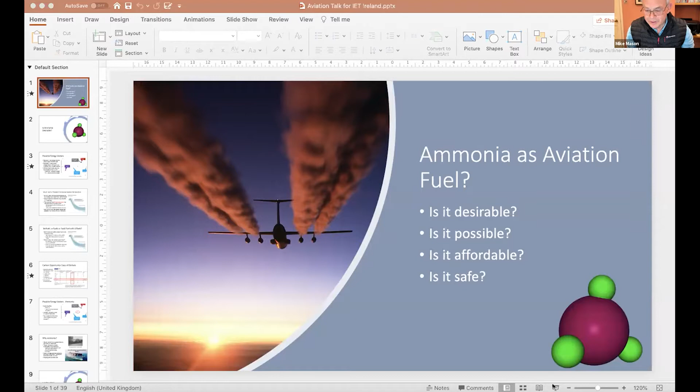Hello everyone. Is that up now? Can you see it? That's fine, yes, I can see that. Good. Right, let's move it to a slideshow. There we are. So lovely to have everyone here. And it's a very strange thing, isn't it, talking to an audience that you can't see. It's a bit odd, but it's taken a little while, I've got used to it now.

What I want to do today is to challenge people about where they think aviation may go. We've heard a lot about batteries, a lot about hydrogen, something about synthetic fuels, and I want to throw all of those into the pot and look at the question again to see whether we might have been missing something important.

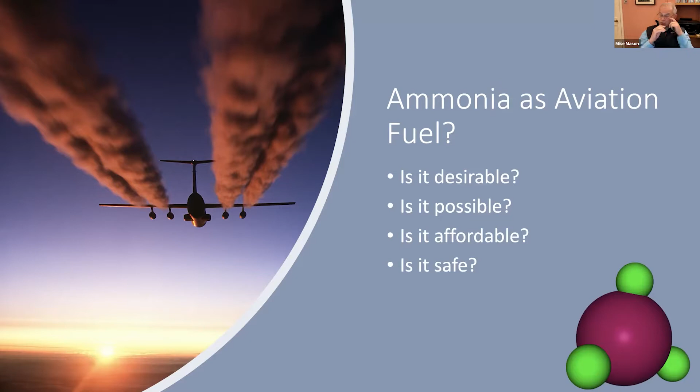So ammonia as an aviation fuel. We've got four questions we need to answer. The first is: is it desirable? Do we actually want it? Is it possible? Is it affordable? And then finally, and probably the most difficult, is it safe? So what I'm going to try and do in the next few minutes is talk through each of those pieces in that order. Let's start with, is ammonia desirable?

So what possible energy vectors have we got? Batteries: future batteries will get better than they are today, but this graph shows on the x-axis the gravimetric energy density of various ways of powering your aeroplane, and on the y-axis the volumetric energy density. Note they're both log scales, and batteries are right down at the bottom left-hand corner. Not a really good place to be.

Hydrogen is incredibly good in gravimetric terms, right off the right-hand side of my graph, much better than kerosene up at the top right. The problem with hydrogen is that you're fighting with physics to use it. The US government has a target for practical storage of hydrogen, which takes you right down to that solid blue dot. The reason is that to have liquid hydrogen, you need to operate at minus 253, about 20 Kelvin. Alternatively, you have to pressurize to 700 or 800 bar. But even as a liquid, there is almost twice as much hydrogen in a liter of liquid ammonia as there is in a liter of liquid hydrogen. Hydrogen superficially looks very interesting, but it's not really going to solve many problems for long-range flight.

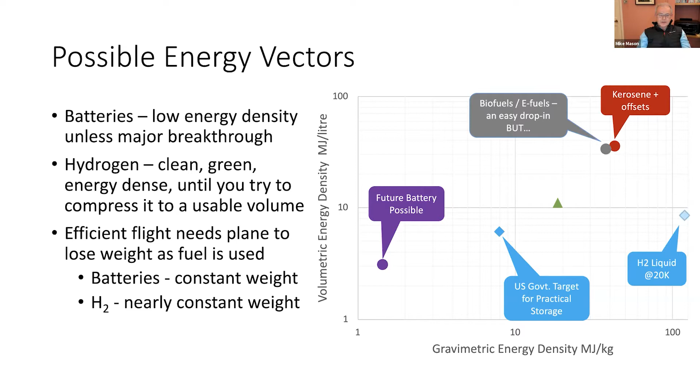So that leaves us with biofuels and e-fuels. Biofuels are made from bits of plant, oils. E-fuels would be made from carbon dioxide, which you then chemically reduce and combine with hydrogen to produce chain elongation, producing fuels you can use as drop-ins as a replacement for kerosene. Looks good, very interesting, but let's just look at what the world might look like by 2040, 2050, when these become the normal way of flying.

The graph on the right, some of you might have seen, is from the summary for policymakers of the IPCC's special report on holding temperature rise to 1.5 degrees centigrade above background. 1.5 degrees is tougher than the Paris target of 2.

It is probably in its own right already too high, but as one famous British government chief scientist said when questioned why he wasn't making these points to politicians, he said if we said how difficult it was going to be, no one would believe us and they wouldn't do anything.

The blue region there gives you an idea of where we might need to be with no or limited overshoot in our budget. There'll be a bit of overshoot. The gray is what we might have to do if we have more realistic amounts of overshoot. And if you look at that, you can see that somewhere like 10 gigatons a year of negative carbon dioxide is what we're going to need.

This is not net zero, guys. Don't be fooled by the comments about, oh, we're going to get to net zero. No, no, no, we have to get to net negative. And when you're at net negative, there is no carbon coming from convenient flues or anything like that.

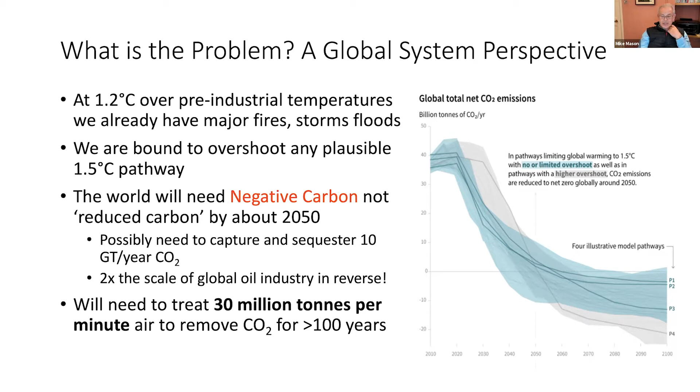Now, in that context, imagine that you're going to capture some of your CO2 and turn it into fuels and re-emit it. Well, every ton of fuel emits 3 tons of CO2. Business as usual emissions suggest that by 2050, we'll be at 2 to 4 billion tons a year of CO2 from aviation. And that adds 20 to 40% to an almost impossible global CO2 capture needs.

This is not likely to happen.

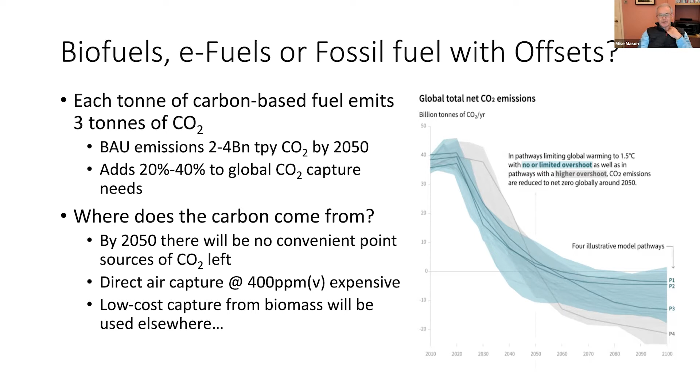Biofuels then are the next resort that people turn to and say, well, but can't we use biofuels? And of course you could use biofuels. You can make airplanes fly on biofuels with no problem at all. But we are already deforesting large parts of the world to feed us. To get a ton of biofuel, you need a ton of palm oil.

There's your vegetable oils. That's the CO2 emissions that come from producing a kilo of them. If you want a ton of vegetable oil, it'll cost you 11 tons of CO2. Now that's a combination of direct emissions and indirect emissions, the opportunity cost of not reforesting those spaces. And in the case of oils, you've got lots of peat being lost in Kalimantan to provide the land for the palm plantations. And of course, you've got massive biodiversity loss.

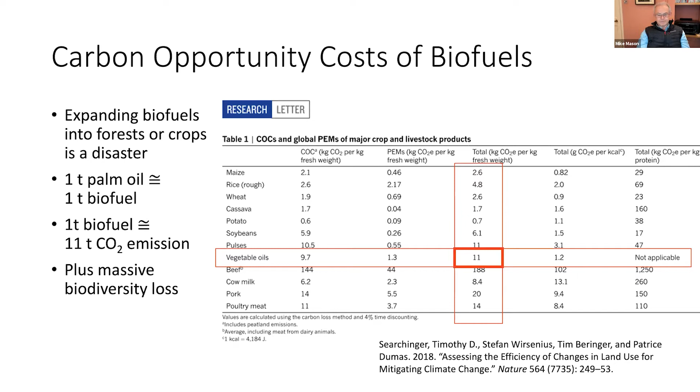But then when you've got your ton, you've still got 3 tons of CO2 that you've got to dispose of. You can't just keep, you'll have to keep getting that back.

So this leaves us with ammonia. Ammonia is easily liquefied, 10 bar, minus 33 centigrade, which is the air temperature at 8,000 meters anyway. It's a natural liquid. It's very flexible. You can burn it, you can use it in fuel cells. It's not as good as kerosene, but the question is, could it be good enough?

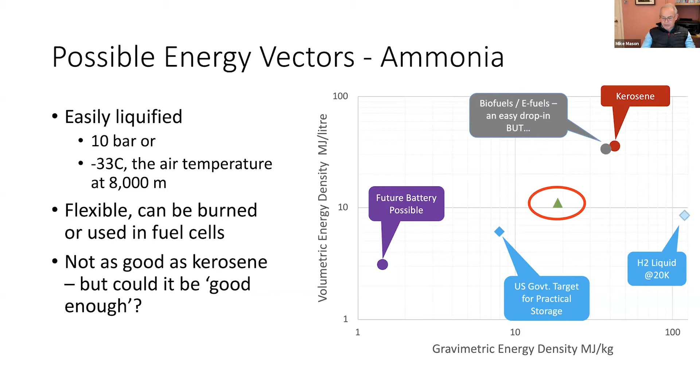It's the best of all the other alternatives that we've looked at. And then, well, why ammonia? What about some other chemistry? Well, you can look around the periodic table. There aren't many other things that you could carry hydrogen with and use as an energy source. I mean, if you go down the periodic table, you end up with solids, silicon, for example, but silicon dioxide is not the kind of thing you want to carry around and be throwing out of an engine. It's sand. And ammonia is interesting.

I mean, brown ammonia has been around for 100 years, a global industry. Green ammonia is totally sustainable in the long term. It's made from earth-abundant stuff, air, water, sunshine, no rare materials, no carbon. There's a huge existing market for it.

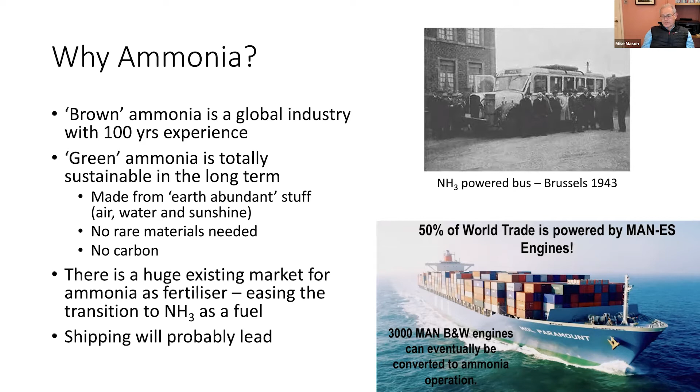Shipping will probably lead. Shipping is already moving towards ammonia. And you can see there in the Second World War, the Germans took all the road fuel for their tanks in the Russian campaign. And so the Belgian municipal authorities in Brussels converted their entire bus fleet to run on ammonia.

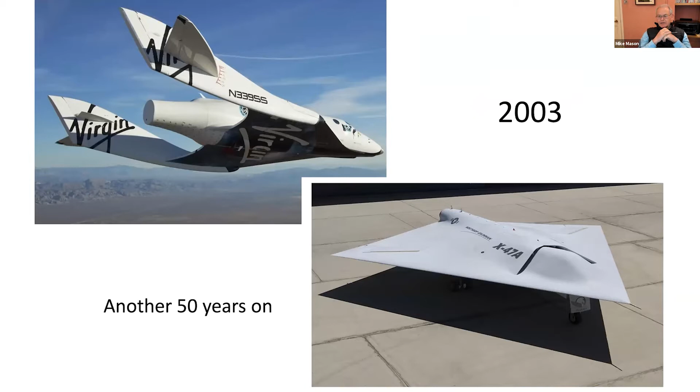So is it possible? Well, let's just look at some 50-year shifts in aviation. That was 1903. That was 1953. That's what you can do in 50 years. By 2003, we were here. There's an amazing change again.

But in civil aviation, in those 50 years, we added a few windows on the top deck of a 747. Of course, there was lots of work went on improving efficiency, engines improved, flight control systems improved, avionics improved, but fundamentally, the plane of 2019 was utterly recognizable as the plane of 1969.

My first thesis is that aviation could move faster. It needs the right stimulus. How would you adapt to ammonia?

Well, there are some major challenges. The first is that ammonia has something like 40% of the energy content per kilogram of kerosene. And the big one is that ammonia brings safety concerns as a result of vapor toxicity. It's really toxic at a concentration somewhere above 3 to 3,500 parts per million in the air.

So what are the fixes we could put in place? Well, the first is we could move from jet to propeller. This increases your propulsive efficiency materially. It will slow the aeroplane down, and that might be a price we have to pay, though the use of ducted fans and contra-rotating propellers might give us quite a lot of that speed back.

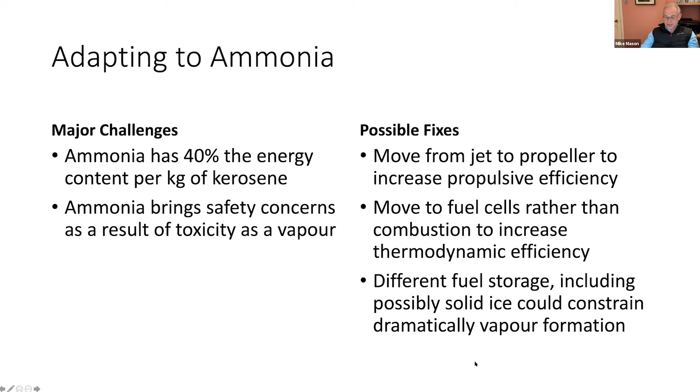And the prize is huge. We could have quieter, zero emissions aviation. It would become the most sustainable form of transport of all. It would move from pariah to prize. Very, very little land take, much less than rail or road, no intrusive noise, much faster than the alternatives. It's much safer than the alternatives. It's flexible and responsive. Once you've built a road or a railway from A to B, you can't really move it if patterns of travel change. And of course, it has unlimited growth potential.

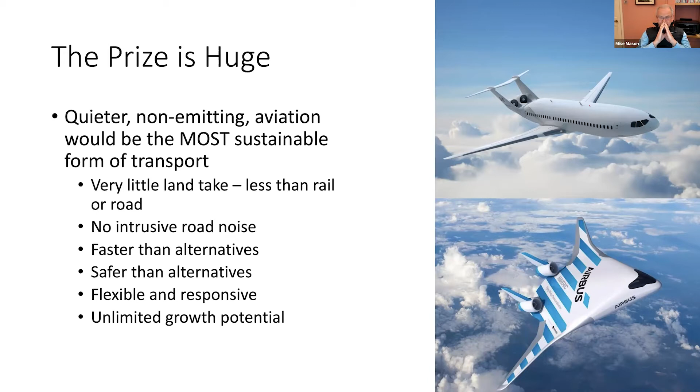So if we're going to use ammonia, we've got two contrasting approaches that we can think about. One is combustion, and the other is fuel cells. Combustion is really a near-term solution. We've got existing manufacturers that know how to make turbines. NOx control is not fully resolved. It's worth just talking a bit about this for a moment.

The problem with ammonia in a combustion process is that when you strip the hydrogen off it to oxidize to water, you leave a nitrogen free radical sitting unbonded. And there's another nitrogen sitting nearby, and hey presto, you get N2 most of the time. But occasionally you get the N bonding with oxygen and giving you NOxes. It's a much easier thing to happen than when you've got just N2 there and you have oxygen as well. That requires a very high temperature to form NOxes.

You can get much more NOx formation at lower temperatures in combustion. The solution to that is being worked on at the moment. In Cardiff University, they're doing quite a lot of work on combustion.

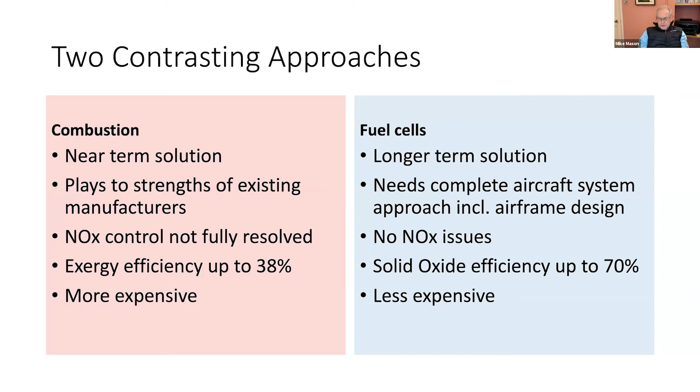Running gas turbines is an expensive business. Fuel cells are different. In the longer term, they're going to be the solution. You need to rethink the complete aircraft system right through to airframe design. There are, of course, no NOx issues. Your solid oxide efficiency is up to somewhere like 70% for solid oxide fuel cells, and they'd be much less expensive to run in the long term. There are no moving parts.

So what's the roadmap for ammonia power look like? What I've modeled here is an A320 class aeroplane. I've taken the same maximum takeoff weight, the same payload. I've done nothing to change its aerodynamics, and there are improvements we can make there. I have made it fundamentally propeller driven. I've reduced the speed from about Mach 0.85 to about Mach 0.45. And I've modeled two different options, an ammonia turbine and a fuel cell electric.

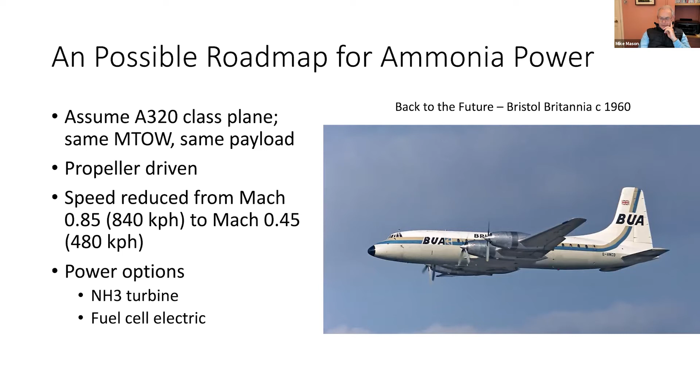That plane on the right is one that I first flew in out to East Africa. It was a wonderful aeroplane, about 385, 400 knots, not a bad traveling speed, not as fast as today.

So if we look at those four options for how we could power this, on the left here you have a graph which is the comparative energy use, megawatt hours per 1,000 kilometers, for four different ways of propelling the aeroplane: the existing turbofan, an ammonia powered turboprop, a 60% efficient fuel cell, and a 70% efficient fuel cell.

The delivered energy at the bottom, the blue bit, is exactly the same across all of them — that's the energy put into moving the plane forwards. The propulsion losses drop considerably, that's the orange band, as you move from turbofan to turboprop or electroprop. Your thermodynamic losses drop dramatically, and the electrical and mechanical losses as you move away from a turbine — that's the gray area. And of course the fuel cell losses sit on the right-hand side with the fuel cells.

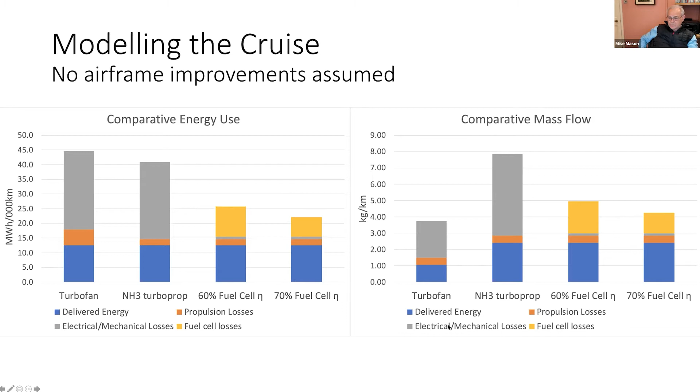So what you see is that in energy terms, fuel cells at 60-70% efficient are dramatically better than kerosene in a turbofan. The graph on the right replicates the same things, but this time it's the comparative mass flow, looking at kilograms per kilometer flown. You see the turbofan is the most efficient in terms of weight. The turboprop looks not very good, and the two fuel cells get better — at just 70% fuel cell efficiency, you're almost as good as the turbofan. That's really interesting. Hydrogen would never get anywhere close to that.

The problem that you have with flying — and I don't know how many of you are pilots — the problem is takeoff and climb. In the cruise you need a relatively small amount of energy, maybe 40% of the power you need at takeoff. And that's convenient because your gas turbine is dealing with air that's only got 40% as much oxygen in it, so the power curve matches roughly what you need at different phases of the flight.

What you actually need, if you're going to climb at 2,000 feet a minute, is a very substantial amount of extra power, perhaps 10 megawatts per engine compared to in the cruise. If, on the other hand, you're climbing at the slower rate of a turboprop, you only need to add something like 4 megawatts per engine.

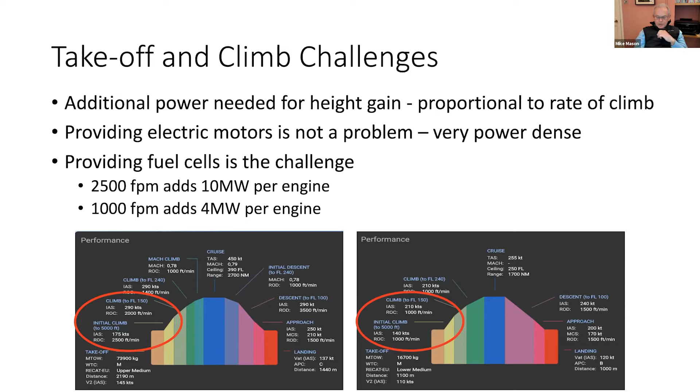And this comes to one of the biggest problems with fuel cells, which is fuel cells are heavy. So you want to size your fuel cell for the biggest part of the flight, which is the cruise. And that leaves you with the question of how the hell do you actually get to the cruise, how do you get in the air? The solution is to have a hybrid, and to put an auxiliary power unit and generator in there — these are very light units with very high power to weight ratios.

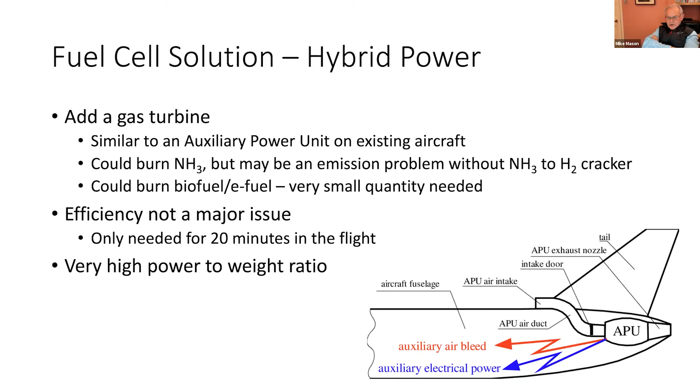You can burn an ammonia hydrogen mix that's been cracked, and you could even burn biofuel E-Fuels. You need a very small quantity indeed — you only need it for the first 20 minutes of the flight.

But let me talk a bit about fuel cells for a moment. Basically, if you think of a fuel cell, it is fundamentally a linear device. Fuel comes in at one end and flows through the cell, and on the way it is consumed, and at the outlet you have mostly consumed fuel.

But of course the rate of consumption will fall as the partial pressure of fuel falls. If you have an infinitely long fuel cell, you could use it all, but that would become incredibly heavy. So you have this problem: do I build a fuel cell that consumes all of the fuel, or nearly all the fuel because it's asymptotic, or do I waste a little bit of fuel? If you want high power density fuel cells, one of the solutions may well be to run them slightly less efficiently and waste more fuel.

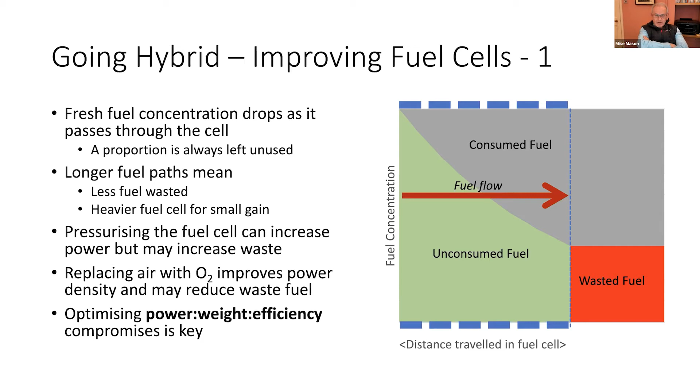The beauty of this, though, is that we can now take the wasted fuel from that and put it into an auxiliary power unit and essentially burn it off and generate power with that too. So we have an interesting piece of engineering here to optimize the balance between the fuel cell and the gas turbine. There's also considerable exergy available to you at 600 to 800 degrees centigrade, and there's some heat recovery possibilities in there too.

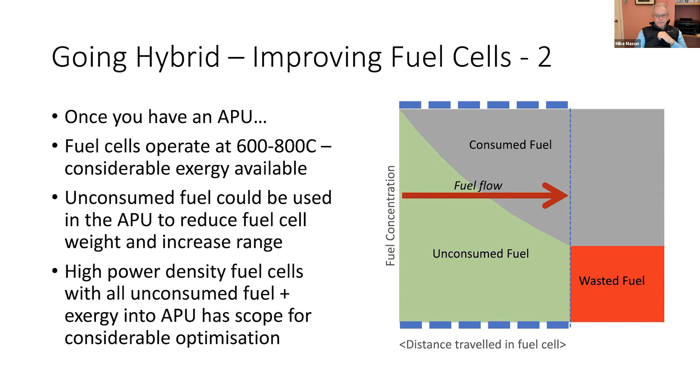So what does this mean for the range of the aeroplane?

On the x-axis, I have the power density of your fuel cell in kilowatts per kilogram, and on the y-axis, we have the range in kilometers. The dotted purple line at the top is the range of a Boeing 737 or an A320 today burning kerosene. If we converted that to a simple turboprop burning ammonia, it would be the brown line in the middle of the graph. So even if we take the simplest of choices, we can realistically get 3,000 and a bit more kilometers of range out of burning ammonia.

The fuel cell options are the two red lines, 60% and 70% efficiency. And you can see that as the power density rises above about 1 kilowatt per kilogram, you start to get really useful increases in range, and you can get up to 5,000 kilometers with high power density fuel cells.

So the way I see this happening is that we will start with turboprops running on ammonia. That will let us put infrastructure into airports, get the systems in place, and allow us to play with safety systems and the like. In the interim period, people will be doing work on fuel cells, and they will come into their own maybe 5 to 10 years later.

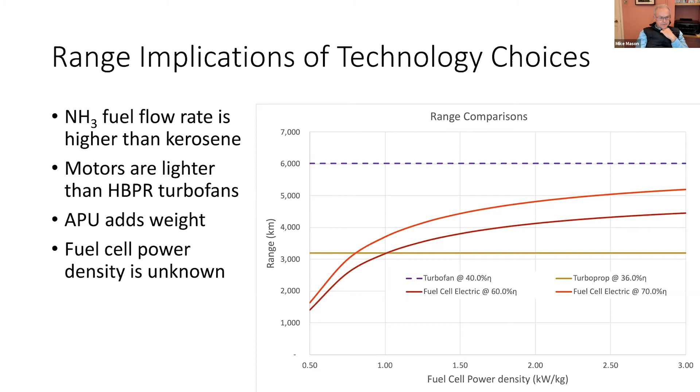Can we afford it? So one of the things about ammonia is that ammonia is made in a number of ways. Today, brown ammonia is made by steam methane reforming

to produce the hydrogen. In the future, it's going to have to be made with electrolysis, and it's going to have to come from renewable power. Solar power in sunny deserts is already about $13.50 a megawatt hour. Perovskite tandem cells due out from people like Oxford PV this year will be hitting 26% efficiencies, and I think they have a roadmap to go to 35% efficiencies.

I can see solar cells producing power at well under $10 a megawatt hour in sunny places. I've assumed no improvements in the Haber-Bosch process; that's pretty mature and unlikely to change very much. What we have here is the cost build-up in dollars per megawatt hour of lower heating value. And you can see today, ammonia at $100 and something a megawatt hour is not a cheap fuel, but by 2030, 2040, it's a very, very competitive fuel.

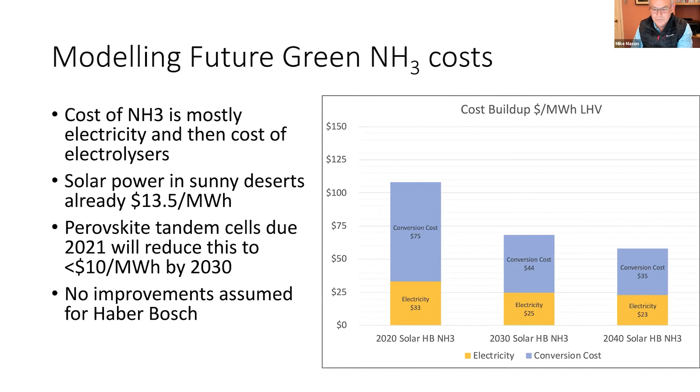How competitive? Well, think about your aeroplane for a second and think about running it on either the turboprop or the two fuel cells. The graph at the bottom left there is just a reprise of the one you've already seen. The larger graph compares a 35% efficient kerosene turbine with a 60% efficient fuel cell propeller-driven plane.

The red dotted line across the middle is the cost per megawatt hour of delivered energy. This is energy imparted to the airframe from the existing engines, and it's about $200 odd a megawatt hour, and that's at today's very depressed kerosene prices. The green dotted line is the same thing with $100 a ton of CO2 added.

The three curves are for different costs of capital producing ammonia and burning it in the plane. What you see: the 2020 is the purple one. 2020 is not very attractive today, and the fuel cells are probably not ready. But by 2030, the light blue, or 2040, the sort of orangey brown one, the delivered energy cost of ammonia is actually cheaper than it is from kerosene. This is hugely important because fuel is the biggest single part of an airline's costs.

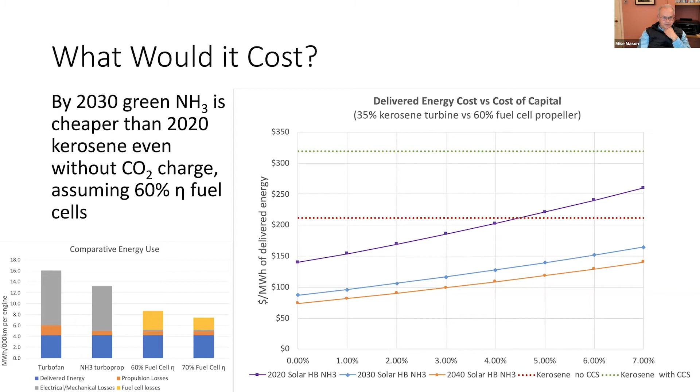So that takes me to the most challenging part of this: how safe is it? The first thing to say is that ammonia is non-flammable. It is almost impossible to light ammonia in open air. And both the UN and the US Department of Transport treat it as a non-flammable substance.

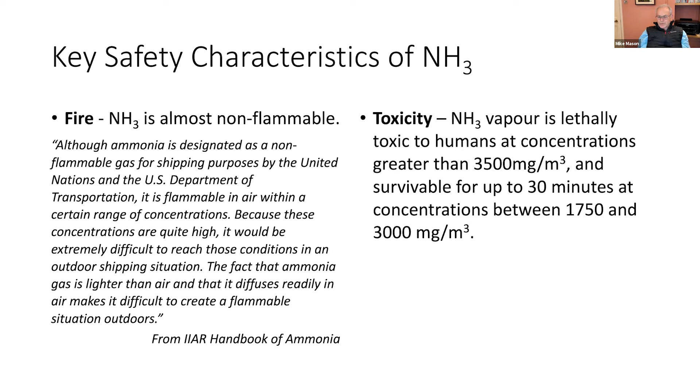The problem for ammonia is its vapor toxicity. It's lethal at 3,500 milligrams per cubic meter. And the last thing you want is people to be caught in that.

So safety implications: on the ground, I don't think we have to worry. We've got 100 years of experience in the midst of urban areas. It's a fairly negligible risk. I think in Los Angeles there are 50,000 tons of ammonia in the docks. In Rotterdam there's 30,000 tons of liquid ammonia in the middle of the city. The fire risk is dramatically reduced compared to kerosene.

So let's just think about aviation. If you have an accident at height with no survivors, ammonia clearly doesn't pose any additional risk because everyone's going to die anyway. And there are two kinds of accidents, therefore, that matter: there are survivable crashes, and there's a surprising number of survivable crashes.

Airplane comes down - classic one is a runway excursion. It slides off the runway, crashes over a bank, something happens, and some people survive. The second type of accident is crashes into populated areas. So the key questions are really, how large are the risks? Because let's be clear, nothing has no risk - and can they be mitigated?

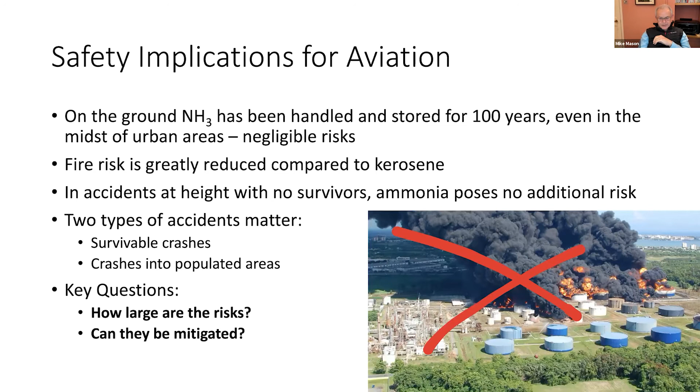So I've looked at every single aircraft crash between 2000 and 2019, 20 years of data, for every cargo plane and every passenger plane with more than 9 seats globally. And the graph shows you the crashes, blue line, and deaths, red line, per billion journeys. It's per billion journeys, not per billion or 100 billion kilometers, because crashes tend to happen on landing and takeoff, not in midair.

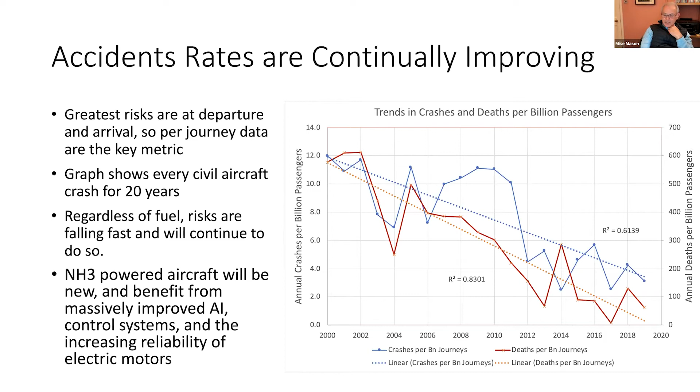Regardless of the fuel, the risks are falling fast, and they will continue to do so. We are moving into a world of much higher levels of artificial intelligence, much better control systems, much more reliable engines. We have aircraft in this crash register that are 50, 60-year-old designs. If you're flying on ammonia, you'll be flying a new design of aeroplane. I think the risks in 20 years' time are going to be vanishingly small.

But when you look at the individual crashes, what you discover is that many of those crashes have no or very minimal fuel tank damage. So survivors are fundamentally not at risk. On the other hand, many crashes involve fires, which cause a major loss of life. So you probably gain more than you lose there.

But let's not accept the gains, let's just look at the losses. A simple projection of the data suggests that by 2040 to 2050, we will see 10 to 15 people's lives being put at risk per billion journeys. Your odds of being struck by lightning are 10 times as high. So I'm not sure—it is clearly a risk, and I'll talk about mitigating it, but actually it is not a material risk going forwards.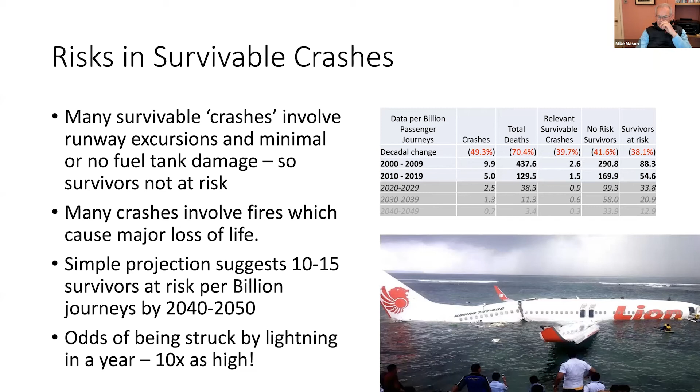Why is that? Well, there seem to be several reasons. The first is there's an increasing number of flights, so every airport sees dramatically more flights. There's also an increasing population close to airports, particularly in a lot of the developing world, where airports started quite far from centers of population, and population has moved closer and closer. And there's a lot of aviation growth in countries with very poor governance and safety culture.

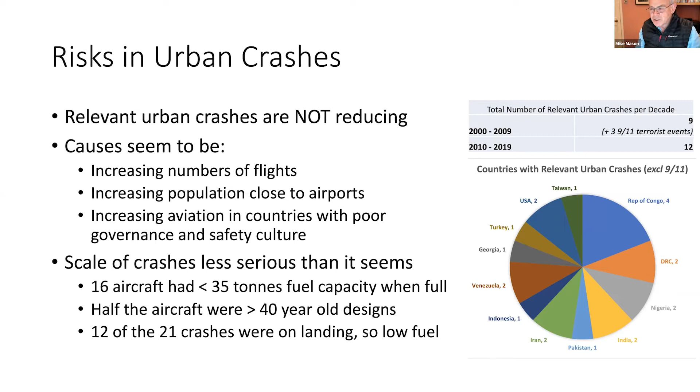And the scale of crash is also a lot less serious than it seems. 16 of the aircraft had less than 35 tons of fuel capacity when full, and half of them were over 40-year-old designs, and 12 of the crashes were on landing with low fuel. One of them didn't have any fuel on board at all. So only a very small proportion of those are material problems.

Nonetheless, we have to look at how we mitigate them. The big problem is going to be vapor. In the late 1940s, when helicopters were coming into the US military, the predecessors of NASA and the US civil aviation regulator looked at crashing planes into concrete blocks to see how they could mitigate fire risk. What they discovered was that in an impact, you create a plume, a plume of mist particles, tiny particles.

The problem with tiny particles is the vapor pressure increases, and this makes life a bit difficult. If you've got kerosene, a very low ignition energy is required, and you get a flash fire.

However, ammonia is very different to kerosene. At minus 77 degrees centigrade, which is its freezing point—a long way above liquid nitrogen, which is a very easy thing to handle and is widely available—the evaporation rate is almost negligible in air. There isn't actually very much energy in air: a cubic meter of air has only got a kilo of air in it, and its specific heat is not particularly high. The specific heat of ammonia is high, and the latent heat of vaporization is surprisingly high. It's quite difficult to get ammonia to evaporate.

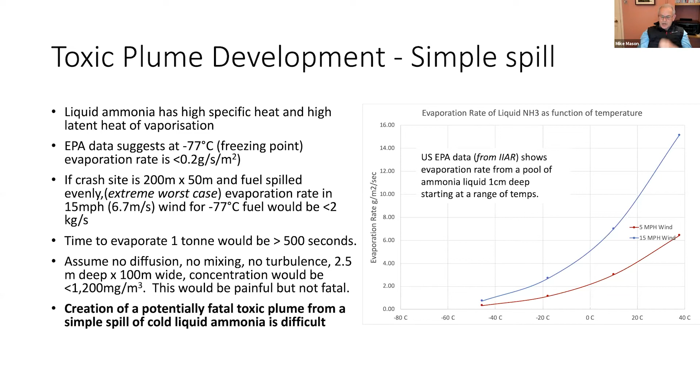You get better evaporation if you follow the blue curve, which is at a 15-mile-an-hour wind rather than a 5-mile-an-hour wind. But of course, if you've got a 15-mile-an-hour wind, you will also have almost certainly much more turbulence and much greater dispersion. Once the ammonia has warmed somewhat, however, it's then lighter than air, and so it rises. So there's a lot of work to do here, but we do start with a position which is quite attractive.

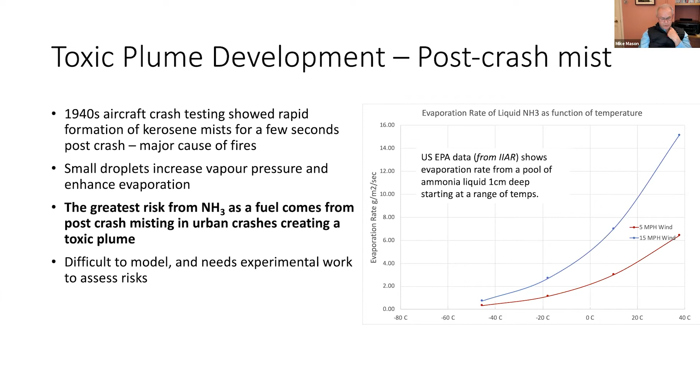It's going to need some experimental work and development, but I think we can do better than just taking a full tank of ammonia liquid anyway. So there are three different ways that we might consider mitigating these risks.

The first is to adopt something the military already use, which is to fill the tanks with open cell foam and have small compartments in them. It doesn't add much weight at all. And if you've ever taken a bath sponge out of the bath, it's surprising how much liquid it will hold for a very long time.

We can dramatically reduce the rate of efflux of liquid ammonia from a crashed and broken open tank by filling it with a sponge. If you then surround the tank in a lightweight fiberglass or something like that as a coalescer, there's a lot of work being done looking at how to coalesce mists, you could dramatically reduce the amount of mist formed. So that's one of the things we can do.

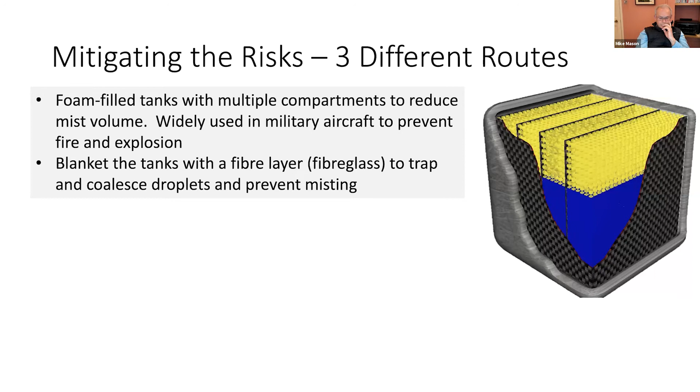The second is really intriguing: we can pump ammonia in as a slush. If you pumped ammonia into the tank at, say, a 75 to 80% ice slush, and then bubbled some liquid nitrogen through, you would freeze it. You would actually have a solid block of fuel. And if you crash that, ice simply doesn't form mists.

You can have some loose fiberglass in there to hold the particles together. And then to get the ammonia out, you simply use liquid ammonia to scavenge the solid, and you've got plenty of heat around to do that with. So basically you have a block of ice and you're taking your fuel off it only as fast as you need it.

The third, which is really intriguing, is to use rheology modifiers to make a sort of honey-like consistency. If anyone has used hand sanitizer recently, you squeeze it out and it comes out slightly thick, a little like runny honey. But what you've got is largely alcohol, isopropyl or ethanol, and they're classically very, very runny. What's been done is a small amount of a rheology modifier has been added, and it creates hydrogen bonds that hold the thing together and make it very difficult to make a mist from.

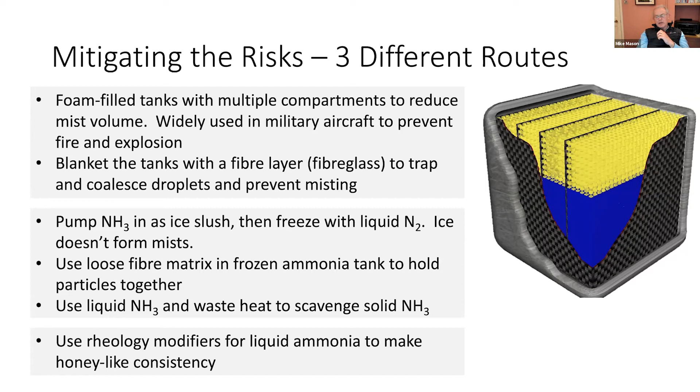Try making a mist from a jar of honey. It's not an easy thing to do.

And what about the passengers? I said there weren't going to be many at risk. Surviving passengers will be closest to the highest concentrations of ammonia during an evacuation. But citric acid neutralizes ammonia very effectively, and ammonium citrate is a safe food preservative, so it's not a great problem. A filter mask with something like 75 grams of citric acid on it would allow you something like 15 minutes of safe breathing at concentrations up to 40,000 milligrams per cubic meter.

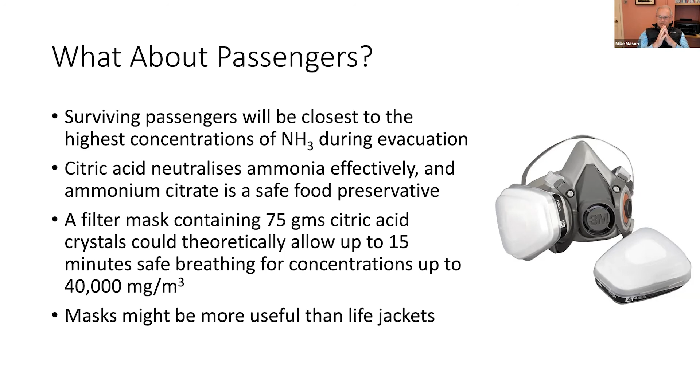In all of my analysis of crashes, I didn't find a single life that was saved by a life jacket, and yet we've all had the drill showing us how to wear it, how to put it on, and where it is. Actually, masks might be much more useful.

Environmental risks are material and we need to think about them. Ammonia is already disturbing the global nitrogen cycle. It's a major issue because it's a fertilizer, or the base of fertilizers, and it enters the water table and the atmosphere. But the reason it's a problem is because we spray it all over the countryside.

Other than rare gross leaks, ammonia as a fuel is nothing like that risk, orders of magnitude less of an issue, because the whole purpose of your ammonia distribution system is to contain it. And because ammonia is really easy to smell, very low concentrations can be easily detected by smell alone, so small persistent leaks are found.

And I want to just mention NOx. NOx can be avoided with fuel cells. We can control it in combustion, either by adding traces of ammonia into the back end, or actually just cracking to hydrogen before combustion. You can't get it pure enough to use in certainly the current generation of PEM cells, but you can use it in solid oxide fuel cells.

You have the great advantage that cracking ammonia to hydrogen and nitrogen is endothermic, so you can recover some of the exergy available in your exhaust gas and put it back into chemical energy in the form of hydrogen. So it's actually both an energy efficient process, unusually for something that is a pollution remover, it adds to the energy available to you rather than subtracting it.

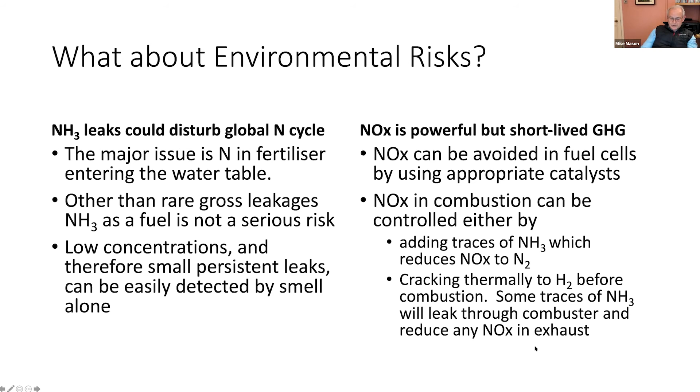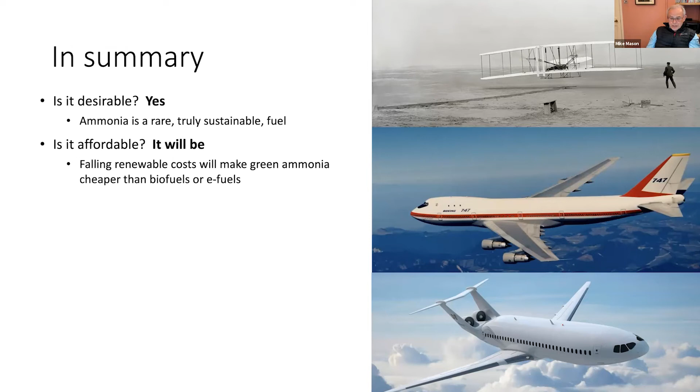Is it affordable? Well, I think it will be. I think green ammonia is going to be cheaper than biofuels or e-fuels, and it's almost certainly going to be cheaper than kerosene today if you use it in a fuel cell.

Is it possible? Yes. We're going to need to do some R&D, there's no question about that. We've got to think very hard about infrastructure and how we develop aviation and how we build our aeroplanes to suit the kinds of spaces and mass distributions that are going to be needed. But there's no fundamental physics or chemistry or engineering that says we can't do this. The numbers just work.

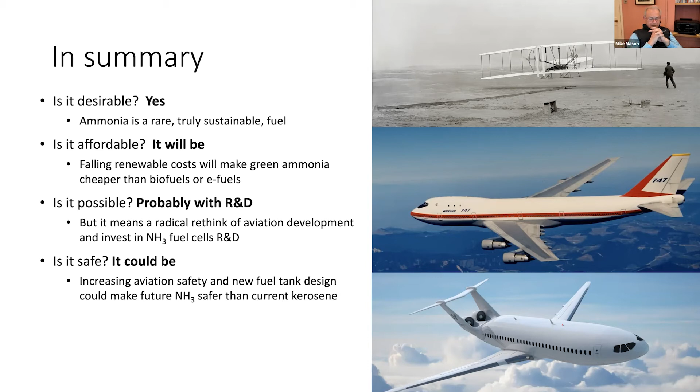Is it safe? Yes, it could be. New fuel tank design is going to be the heart of this, and increasing aviation safety just takes away a whole class of risks.

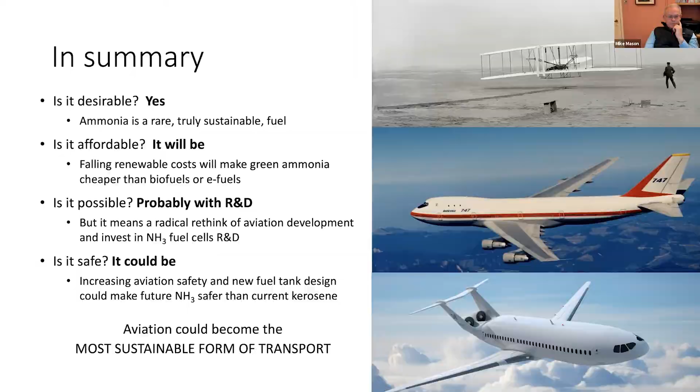So I would contend that ammonia-powered aviation could become the most sustainable form of transport, beating all of them, and actually moving aviation from the industry everyone loves to hate to the industry everyone loves. And that's it. Thank you very much.

Thanks very much, Mike, for an excellent presentation. I now have some questions to pass on to you. The first question: is ammonia included in the Sustainable Aviation Fuels bracket? And how can we motivate Rolls, GE, P&W to build engines in this way?

Dear attendee, are you from Rolls-Royce, GE or Pratt & Whitney, please? I have had indirect dialogue with Rolls. It's a challenge because their entire businesses are premised upon the kinds of things they have spent billions and billions of dollars working on. And all of these businesses take where they are and try to extrapolate forwards, saying, how are we going to adapt to this world of sustainability? What they actually need to do is go to 2050 and extrapolate backwards. And those two lines don't always meet.

So I think we're going to have a real problem with the incumbents. We've had the same thing happen in the motor industry, and Tesla has dragged them kicking and screaming into the world of sustainable transport. I'm not sure how we're going to do it, but it will happen, and it might just happen because the airframe manufacturers, the Airbuses and the Boeings, see this as an opportunity to grab a big piece of the industry that they otherwise don't get, which is making powertrains.